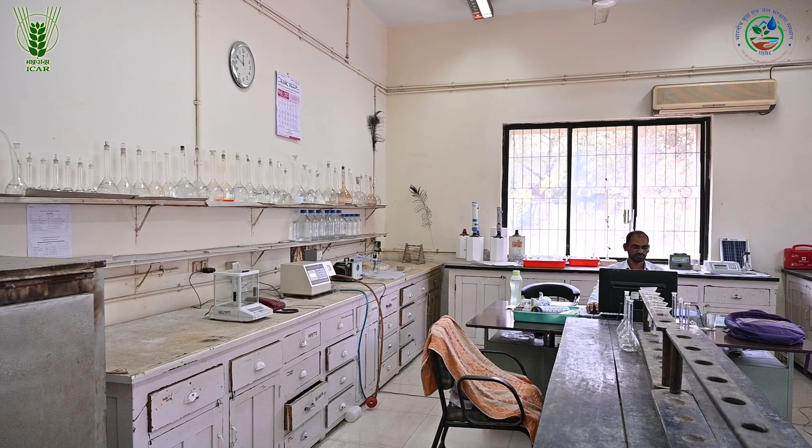Vasad Center is one of the centers established in May 1955. The center acquired a 139 hectare farm along the right bank of River Mahi, which is representative of the problem of the area, in 1956. Subsequently, the administrative control of the center was transferred to the Indian Council of Agricultural Research on 1st October 1967.

R&D activities of the center focused on evolving strategies of soil and water conservation on watershed basis, tackling special problems of ravine reclamation. A complete package of practices has been developed for protection of ravines while putting it to productive utilization.

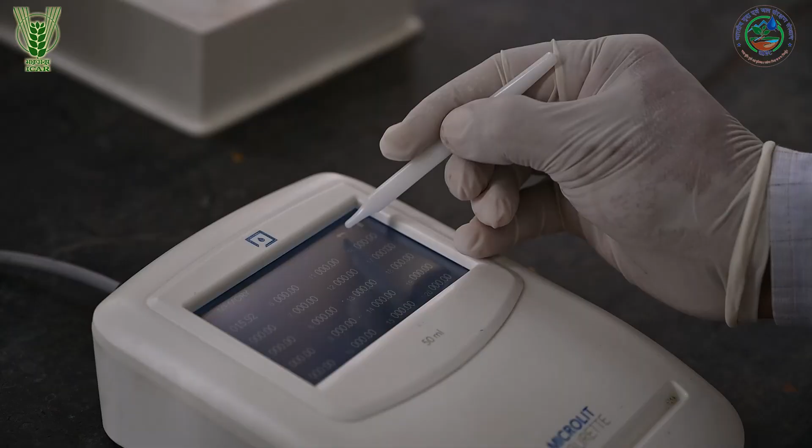Popularization of watershed management concept and technologies, strategies for groundwater recharge and management, demonstration of technology and imparting training are important activities of the center.

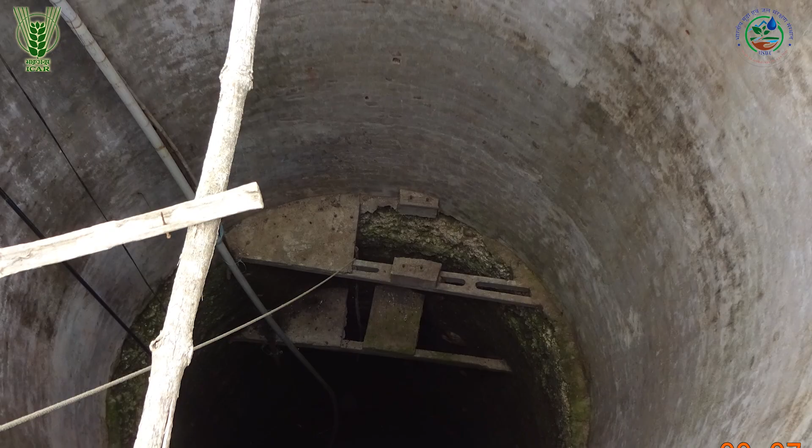The easy accessibility of groundwater by even small-scale users, its local availability, and difficulty of coordinating and governing many users of the same aquifer across wide geographic spaces has frequently led to indiscriminate extraction of this precious natural resource for domestic, industrial, and agricultural uses around the world.

Groundwater exploitation, particularly in India, has increased by leaps and bounds over the last 50 years, along with the expansion of shallow, mostly private wells. At the same time, changes in the hydrologic regimes, in particular, the growing scarcity of surface water supplies as agricultural and other users have expanded, have pushed water users to seek groundwater alternatives.

The natural recharge studies carried out over different hard rock terrain indicated that only 5 to 10% of the seasonal rainfall recharges the groundwater. The meager annual replenishment of the natural recharge to groundwater alone with multiple uses may not be able to meet the projected water demand of 17,000 million cubic meters per year by 2050.

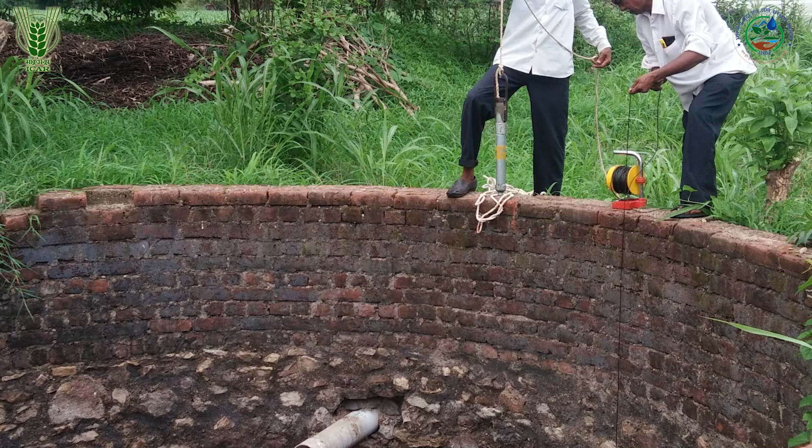To respond to the growing groundwater crisis and take advantage of the high levels of runoff not captured by natural recharge, augmenting groundwater resources through artificial recharge of aquifers has become widespread in India over the last decade.

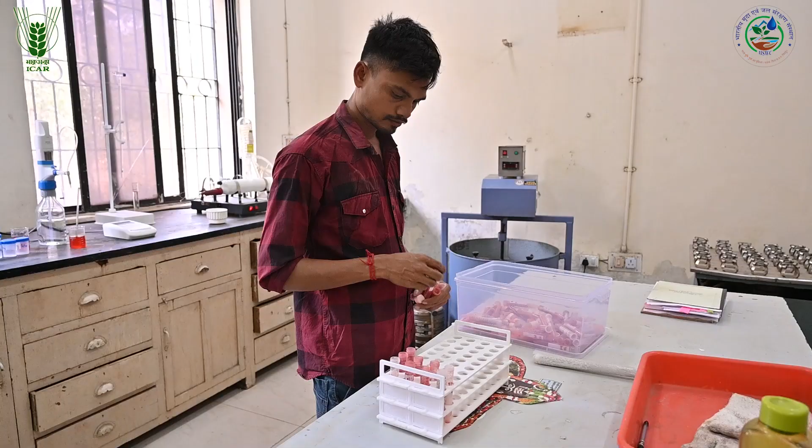ICAR, Indian Institute of Soil and Water Conservation Research Center, Vasad, located in Anand district of Gujarat, has developed a sand-based runoff filter to capture the runoff from farmers' fields for artificial groundwater recharge. The runoff harvesting and its recycling through groundwater recharge is the flagship technology of the circular economy.

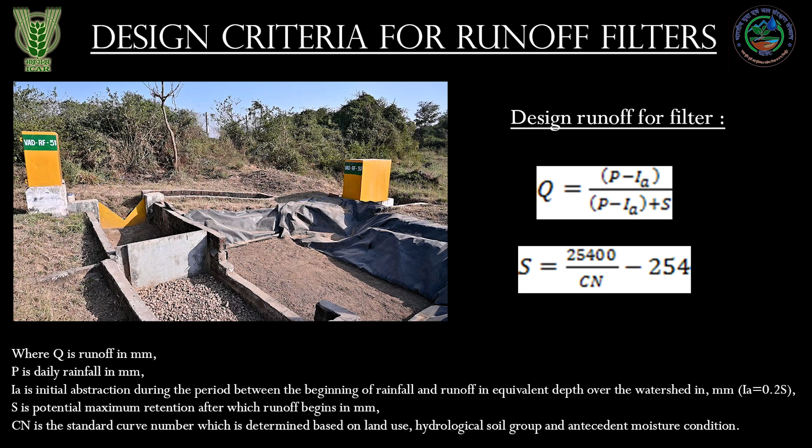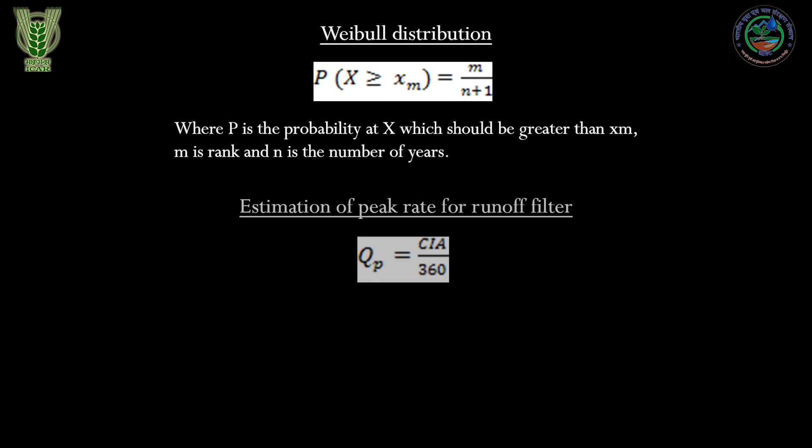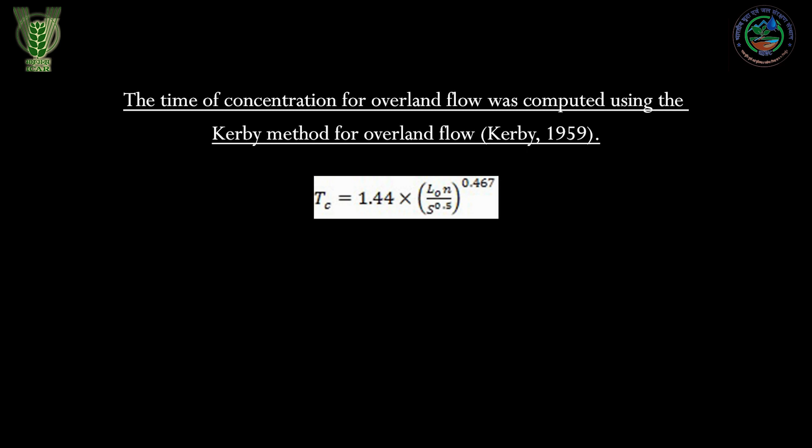The runoff estimation for the design of runoff filters was carried out using the USDA SCS curve number method, and the Weibull method was used to find out the design runoff at 80% probability using Weibull's distribution for the semi-arid regions of central Gujarat. The peak runoff rate was computed using rational formula. The time of concentration for overland flow was computed using the Kerby method for overland flow.

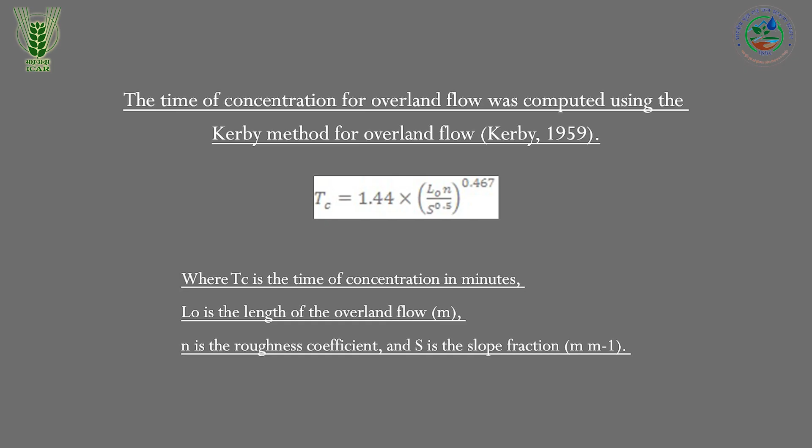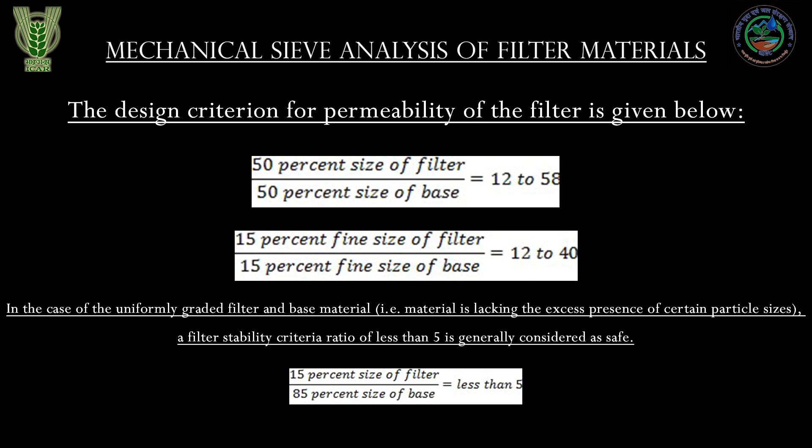The selection of suitable material for the construction of runoff filters should be based on a gradation curve using mechanical analysis of different sizes of available filter materials. The materials should be arranged in ascending order of their sizes, namely fine size material on the top and coarse size material at the bottom of the runoff filter. The two criteria of permeability and stability of filter layer are required to be contended.

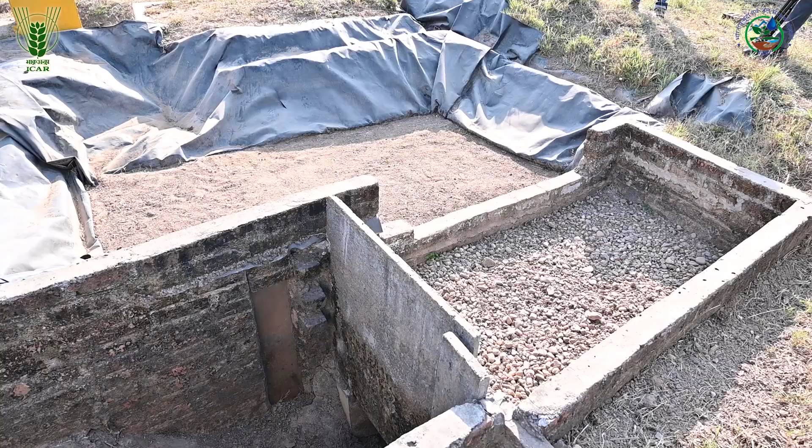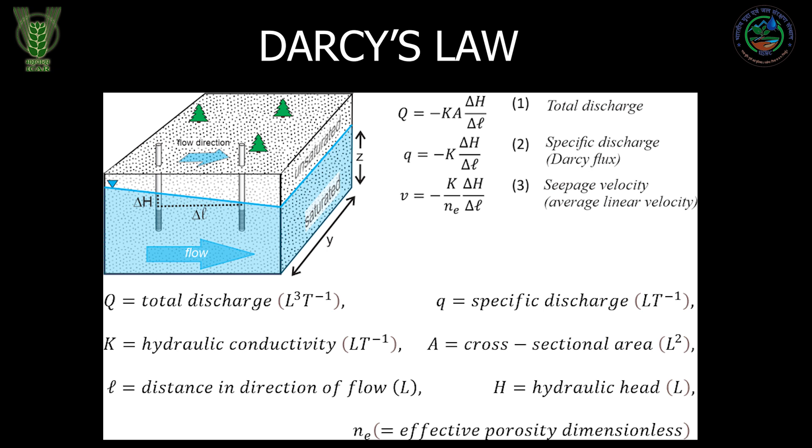The design criteria were developed by the US Bureau of Reclamation, Winger and Ryan 1970, and the USDA Soil Conservation Service SCS 1988. In the case of the uniformly graded filter and base material, that is, material lacking the excess presence of certain particle sizes, a filter stability criteria ratio of less than 5 is generally considered as safe. The recharge rate through the filter is governed by Darcy's law.

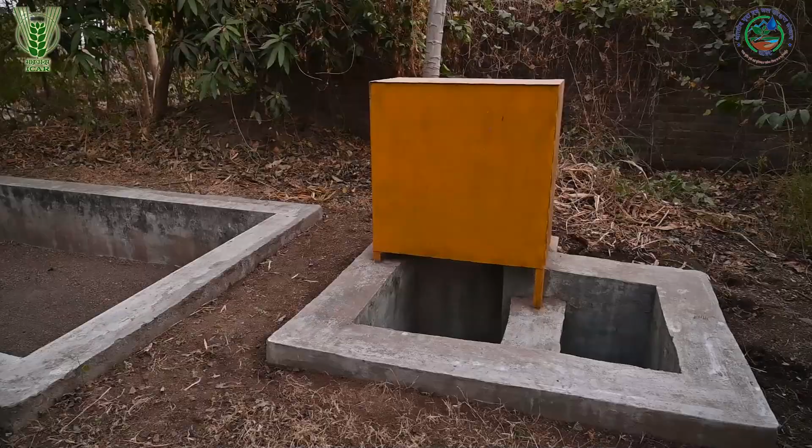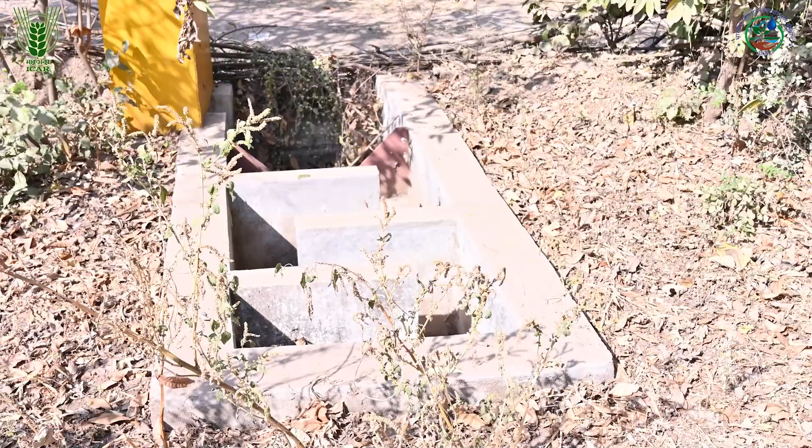The hydraulic properties of the top layer of the runoff filter having finer material, that is, sand, govern the recharge rate. The particle size and its distribution, permeability of the sand layer, the surface area of the sand layer, thickness of the sand layer, and the head of runoff over the top surface govern the recharge rate and sediment trap efficiency through runoff filters. The other coarser layers beneath the finer material layer just provide the support required to hold the finer layer. The main filtering of runoff is carried out by the top finer layer.

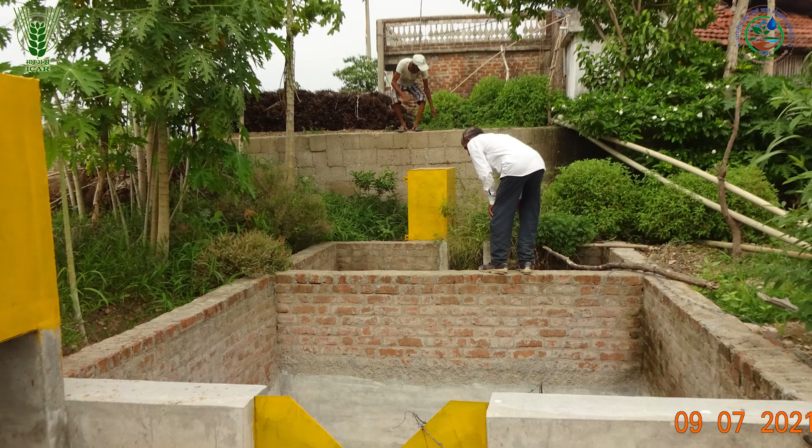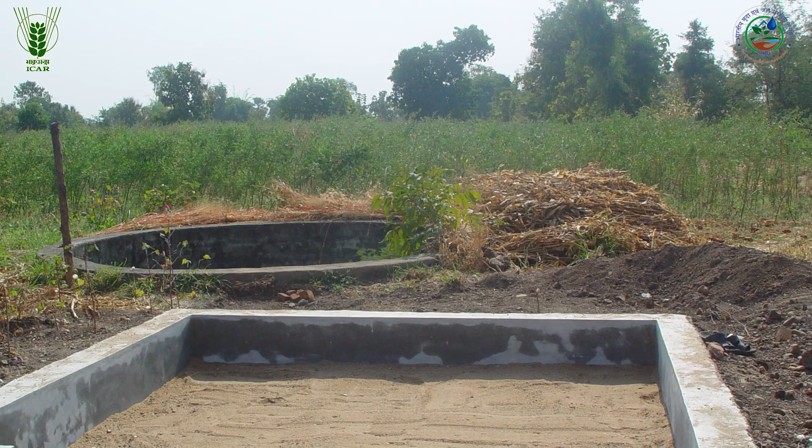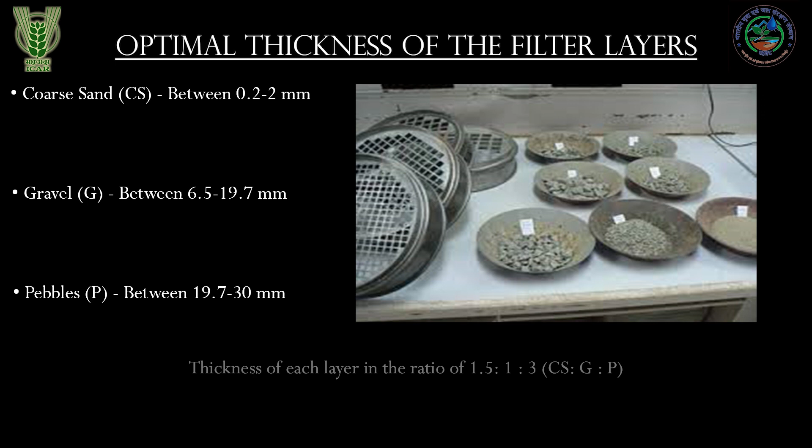The filtered runoff can suitably be conveyed through PVC pipes of appropriate carrying capacity to recharge the dug wells, tube wells. The optimal design of runoff filters with 3 layers of coarse sand with particle size distributed between 0.2 to 2 millimeters, gravel with particle size distributed between 6.5 to 19.7 millimeters, and pebbles with particle size distributed between 19.7 to 30 millimeters should have a thickness of each layer in the ratio of 1.5:1:3. The additional layers of charcoal and potassium permanganate or other suitable chemical treatment are required to remove the microbiological contamination to make it suitable for drinking purpose.

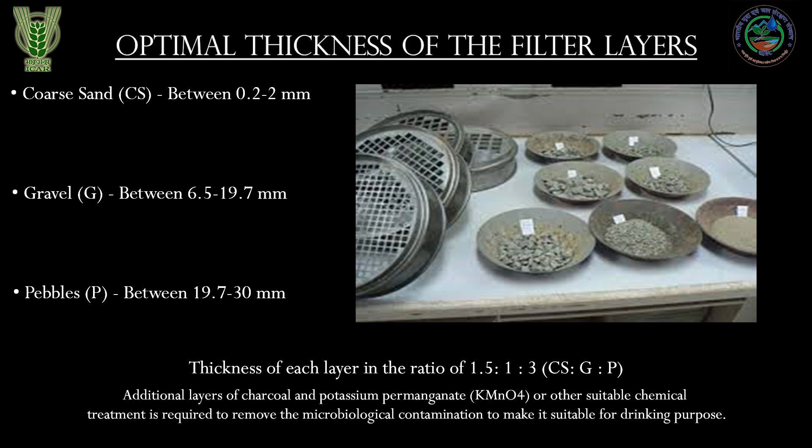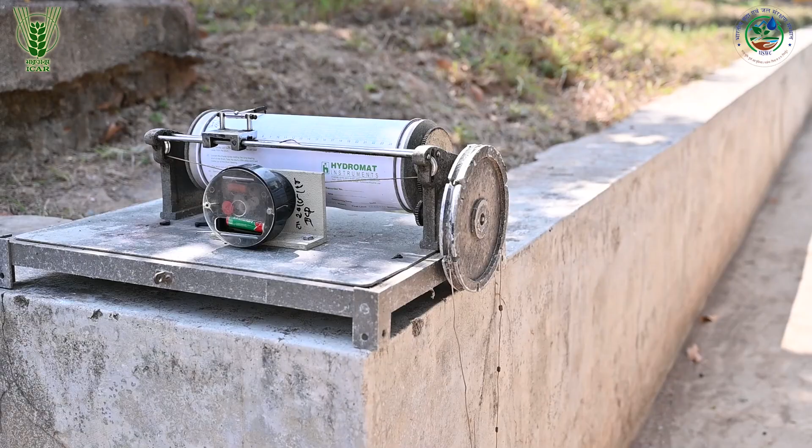The hydraulic head and recharge rate were measured using the stage level recorder and 90-degree V-notch. The runoff charts from the stage level recorder were digitized using Surfer software to compute the hydraulic head and recharge rate. The runoff samples entering and leaving the runoff filters were manually collected on the downstream side of V-notch for assessing the sediment trap efficiency of the runoff filters.

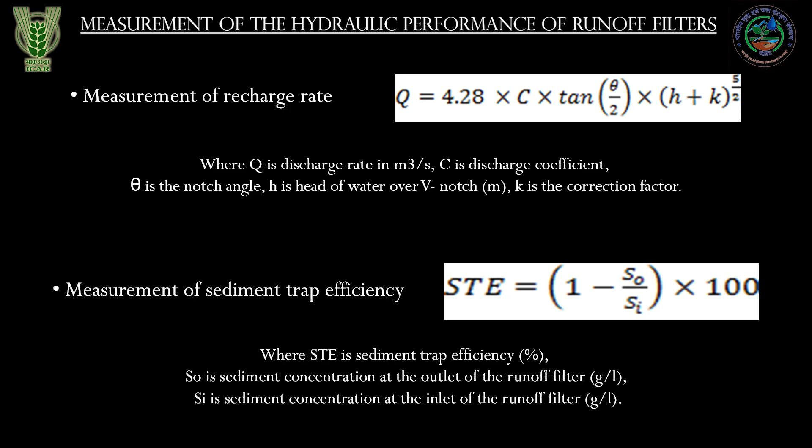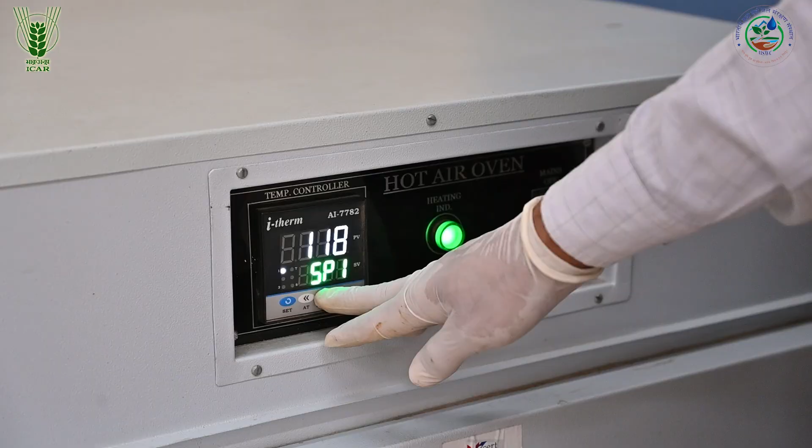The runoff samples were dried in the oven and weighed in the physical balance. The sediment per unit of runoff was multiplied with total runoff generated during a particular rainfall event to calculate the sediment at the inlet and outlet of the runoff filter to get sediment trap efficiency.

The runoff filters were designed for 0.4 hectares farm size, usually available with most of the farmers in the semi-arid regions of Gujarat. The design runoff for the filter design was estimated using USDA SCS CN method at 80% probability as 125 millimeters.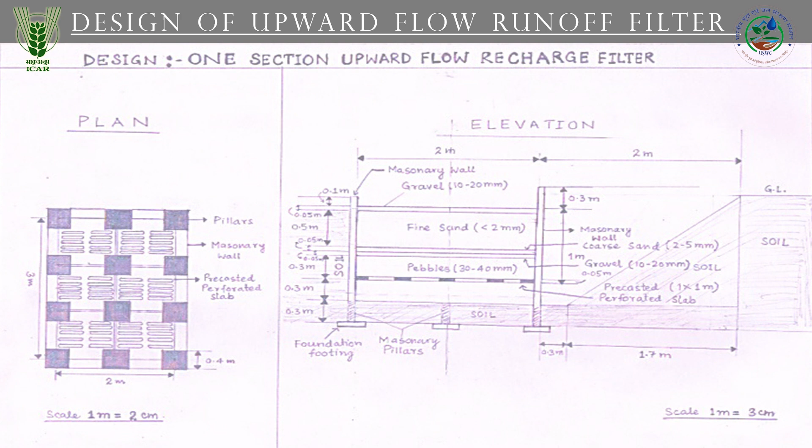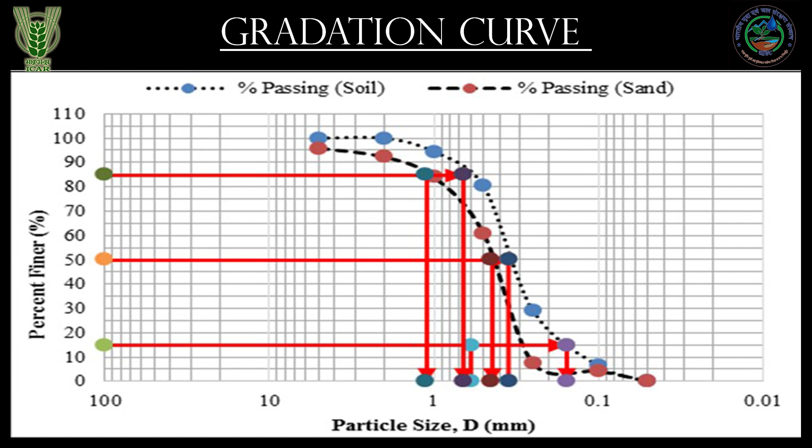The optimum size of the runoff filter was found to be 6 meters square. The material used in the construction of runoff filter layers is based on a particle size gradation curve obtained using wet sieve mechanical analysis in Yoder's apparatus. The filter materials were arranged in ascending order of their sizes, namely fine size material on the top and coarse size material at the bottom.

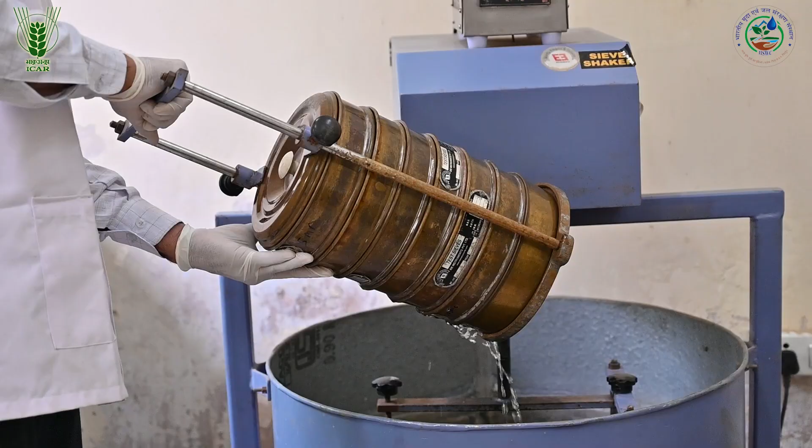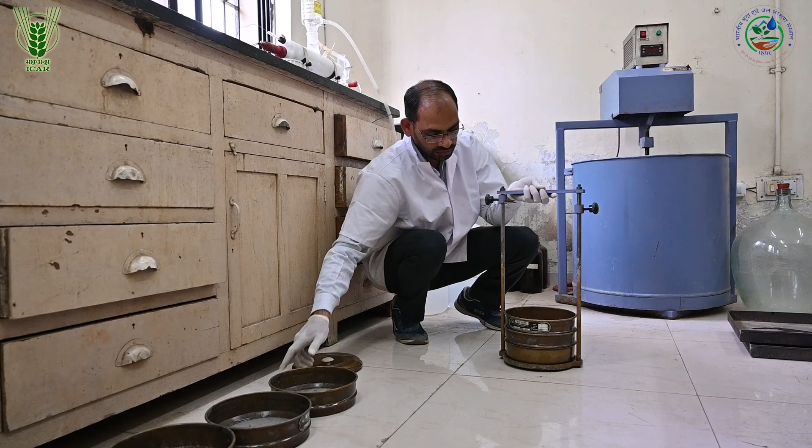The permeability criterion for the runoff filter was found to be 16.42, which was within the range, that is 12 to 40. The stability criterion of the runoff filter was found to be 1.09, which was less than 5. The equivalent hydraulic permeability of the runoff filter was found to be 2.56 × 10⁻³ meters per second. The hydraulic head of water in the recharge filter was fixed at 30 cm, considering the height of the bund usually constructed by the farmers in their field.

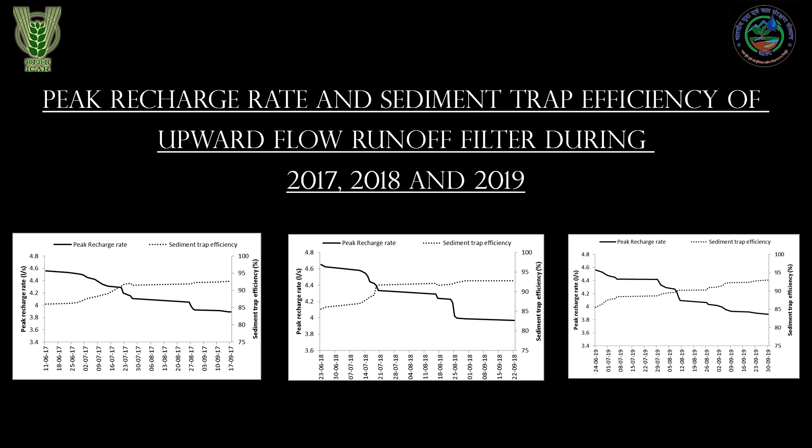Initially, the peak recharge rate of both the designs of runoff filters was similar, in the range of 4.45 to 4.65 liters per second, which was obvious due to similar filter materials used, the analogous thickness of different filter layers, and identical cross section. The average annual decrease in the peak recharge rate of the downward flow runoff filter was 51%. The average annual increase in the sediment trap efficiency of the downward flow runoff filter was 18% per year.

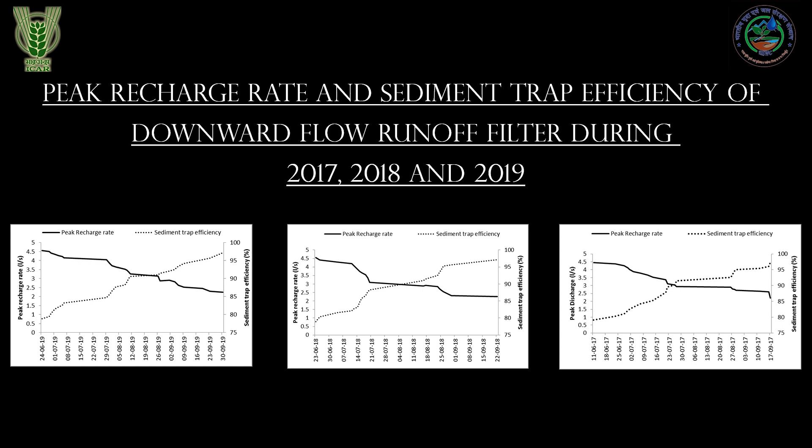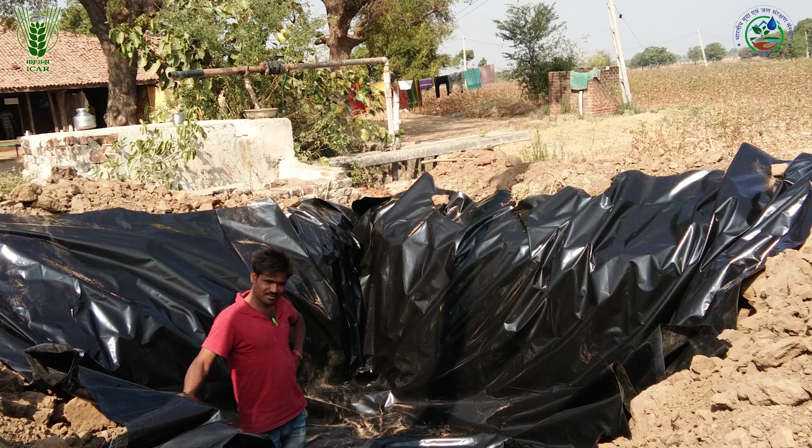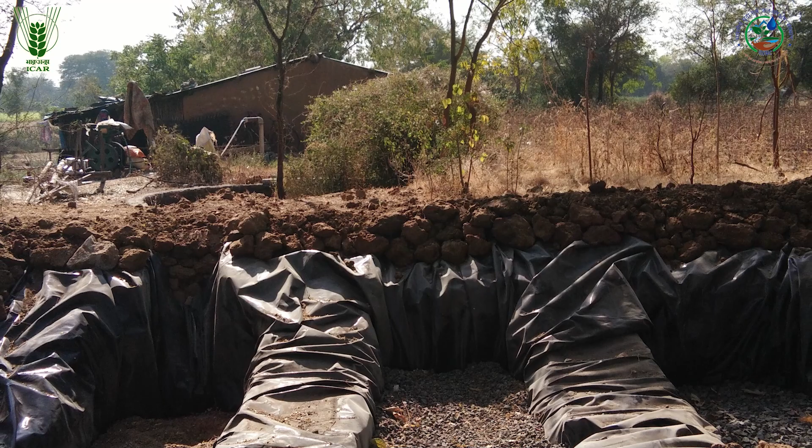The sediments get entrapped in the top 10 cm of the sand layer of the downward flow runoff filter, which reduces the hydraulic permeability of the sand layer exponentially. The removal of the top 5 cm of sand layer of the downward flow runoff filter design could recuperate 70 to 80% of the hydraulic permeability of the sand layer. The sediment trap before the runoff filter was able to trap 42 to 45% of the sediment in the runoff per year, which is required to be removed at least twice a year.

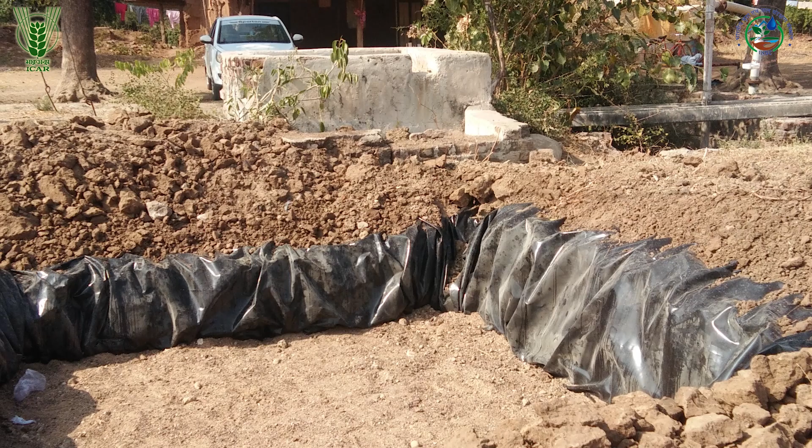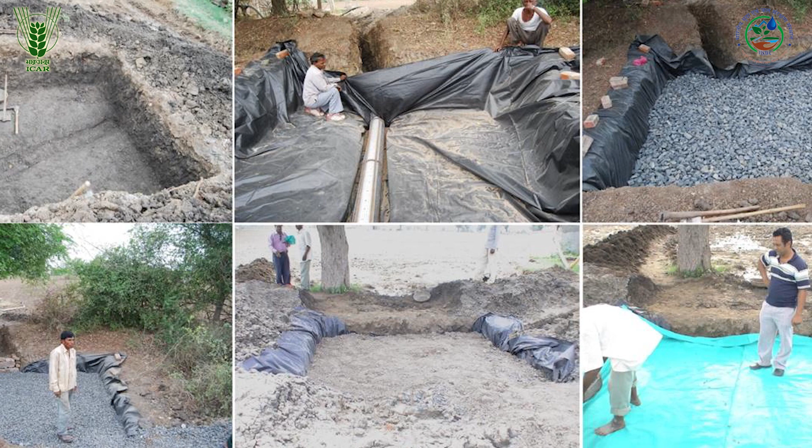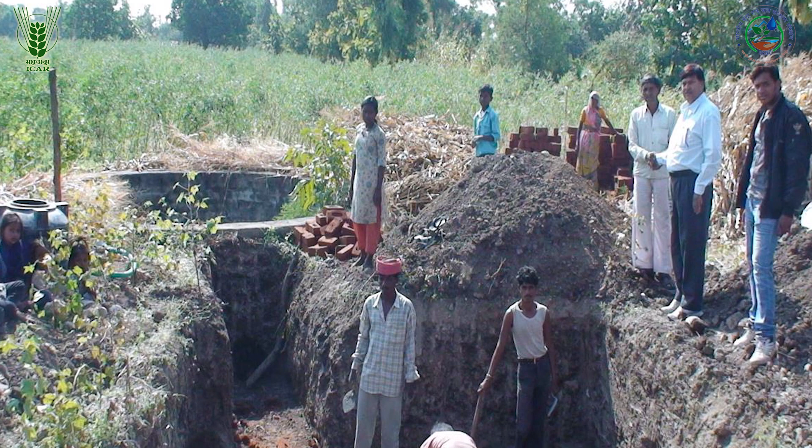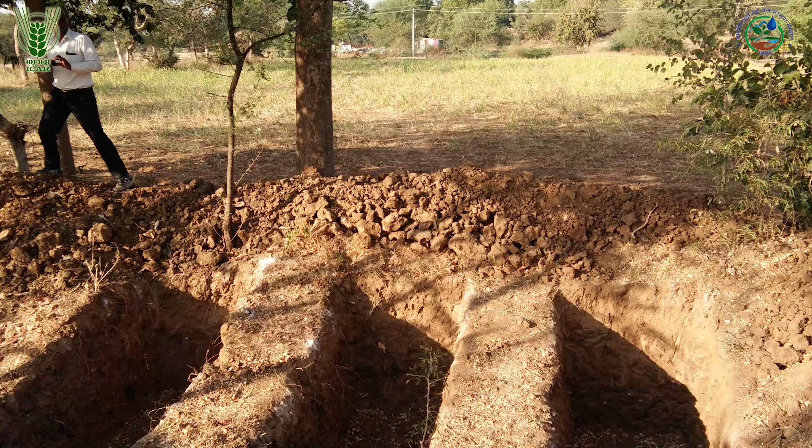The sediment deposited on the top surface of the sand layer of the downward flow runoff filter is required to be removed more frequently, at least 5 to 6 times per year, depending on the sediment concentration in runoff coming from the crop field, for the adequate performance of the downward flow runoff filter. The average annual decrease in the peak recharge rate of the upward flow runoff filter was 15%. The average annual increase in the sediment trap efficiency of the upward flow runoff filter was 6% per year.

The hydraulic permeability of the sand layer of the upward flow runoff filter was relatively less reduced, from 7.0 × 10⁻⁴ meters per second to 6.5 × 10⁻⁴ meters per second per year. The sediment trap before the upward flow runoff filter was able to reduce 82 to 85% of the sediments in the runoff per year. The sediment deposited in the sediment trap is required to be removed 4 to 5 times per year.

The economic analysis was performed for comparing the benefits of constructing the runoff filter to enhance the performance of open wells and bore wells with the cost of construction and the cost of annual maintenance. The average annual recharge through runoff filters varied from 2,380 meters cube to 16,580 meters cube. The groundwater recharge through the runoff filter was primarily extracted for irrigation, which varied from 648 meters cube to 9,216 meters cube at different locations in Gujarat.

The water application was reflected in crop yields realized on these farms located in Gujarat. The additional area brought under irrigation due to enhanced groundwater recharge and the cropping systems practiced in each open and bore well command were analyzed for returns from water use. The average return to groundwater use for the runoff filters was estimated as Rs 5.35 per meter cube, and the average return to cost ratio for the runoff filter worked out to be 2.24, which shows that the investment in the runoff filter is financially viable.